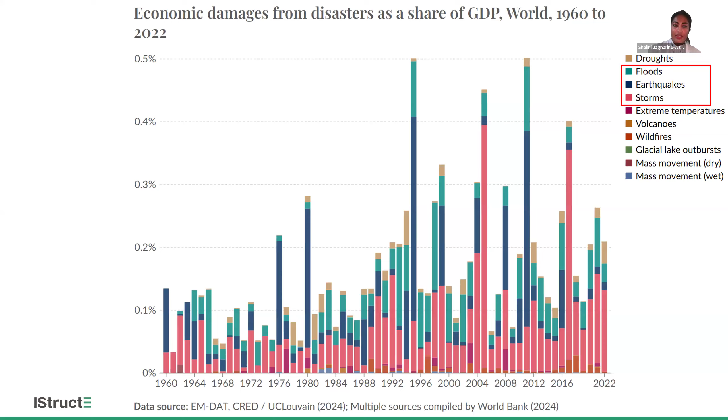Right. So looking at statistics globally, from data compiled by the World Bank, the vast majority of economic damages from natural hazards are a result of floods, earthquakes, and storms, as you can tell by the chart. For South Africa, it remains about the same. So the vast majority, I would say, would be because of storms, followed by earthquakes and floods.

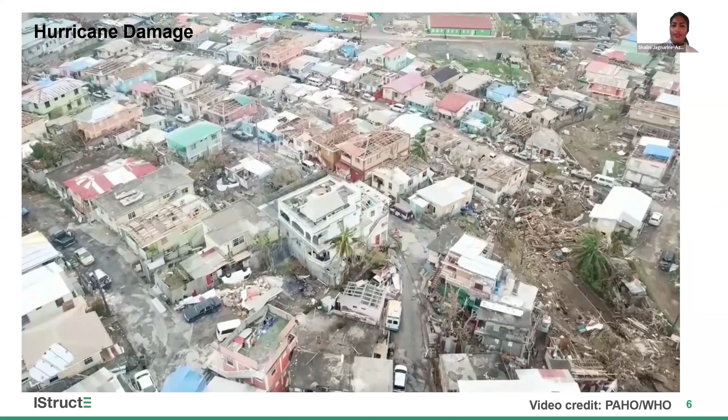Now, this is a short video. I'm only going to show you part of a clip. And this is from Hurricane Maria in 2017 in an island called Dominica. It has a population of about 230,000 people, standalone island. And this is a typical example of what a country looks like after the impact of a major hurricane. You can see that there's widespread catastrophic damage. 98% of all buildings in this country sustained some level of roof damage or complete destruction. I won't show you the entire video, but it's just an example of what it looks like. Pay attention to this river because I'm going to ask about it in a short period.

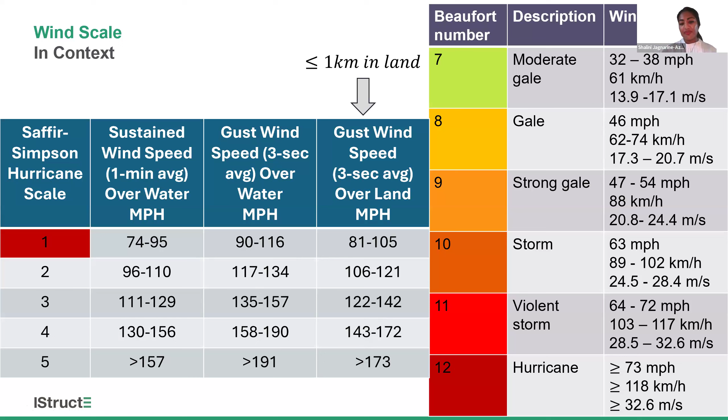Right. So just to set some context between what you use in South Africa, which is the Beaufort scale, for wind speeds versus what we categorize as hurricanes. So you run from scale 1 to 12, your maximum being a category 12, which has wind speeds of about 32 meters per second. That's equivalent to about 73 miles per hour. That is a category 1 hurricane. That's not what we call a major hurricane or a major typhoon or cyclone. That starts from category 3, looking at these wind scales. So the video that I just showed you for Dominica, that part of the country experienced category 4 wind speeds, which is about 65% higher than what your category 12 is in the Beaufort.

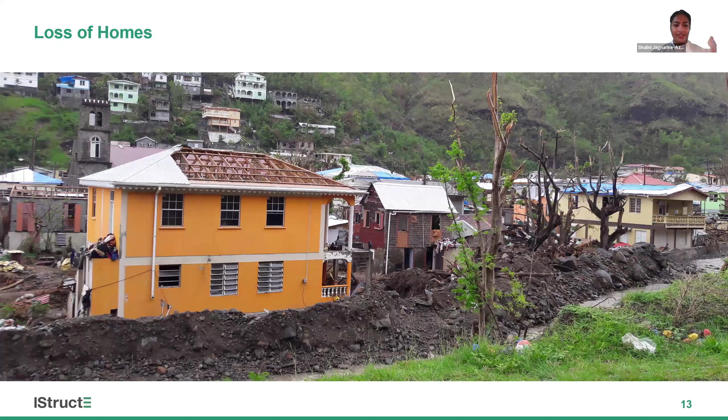You'd have loss of homes, and you could tell by the volume of river sediments that you have in these communities, and it's all because of wash down from the central mountain area that came down into communities. Some other photos that look just like that.

I would think impact would be no access, no services like electricity, water, stuff like that. We don't see this in South Africa, so I'm taking a huge guess now.

Yeah. Sorry. So actually what it is, you see the volume of debris and waste that's produced because of damaged structures and buildings and facilities. That all has to be collected and deposited in an area. Now, Dominica is only 750 square kilometers, or just under 290 square miles. It's a very small space.

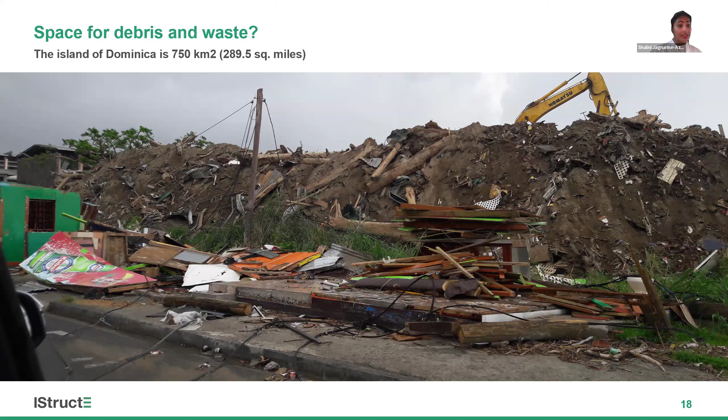What do you do with all of the plastic water bottles that have to be brought in by barge or by boats into these islands to give to the population? I mean, the hundreds of thousands, probably even millions of plastic bottles, that is just as a result of having to respond to the event after the impact of a major hurricane. So some other considerations that we don't just pay attention to as design structural engineers, for example.

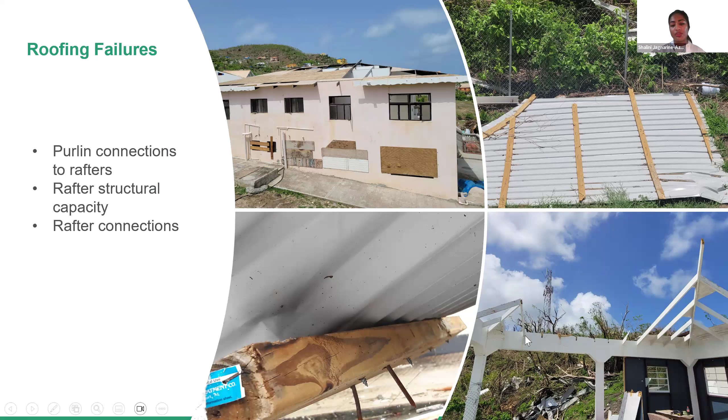Sometimes, and what you'd see a lot, especially in some of the older buildings and the traditional form of construction, is where they embed rafters into part of the ring beam. In some instances, they would run a rebar through part of the center of the ring beam. That already results in a point of weakness in the rafter, where you'd find splitting once the uplift pressures exceed the capacity of the member.

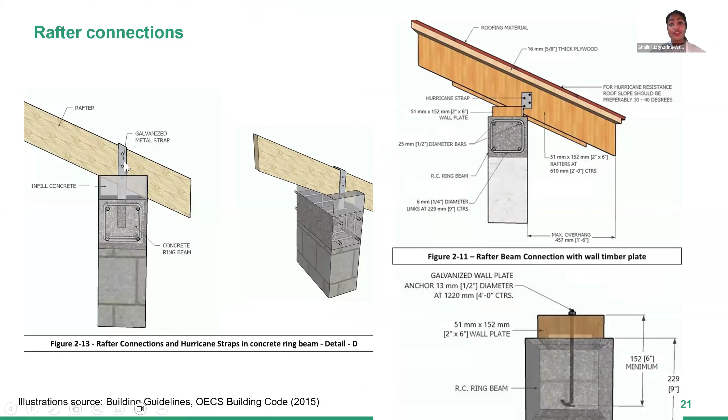Now, another thing, this is just a couple illustrations of how you should connect rafters onto the load-bearing structure below. Just two examples, but there are many different ways that you could do it. Just to note that you aren't damaging or reducing the cross-sectional area of your load-bearing rafters.

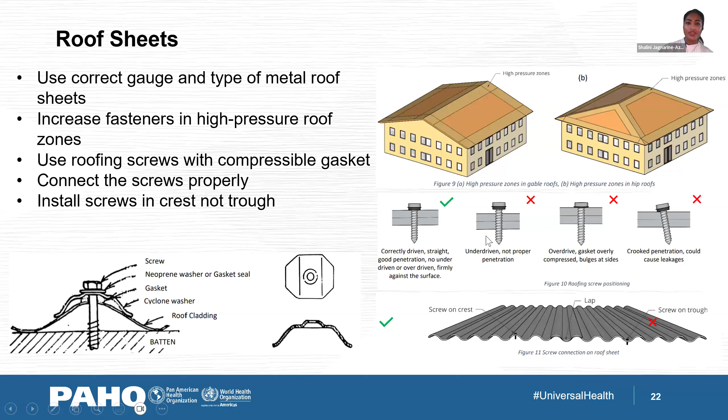But the type of roofing screws that you use, the spacing of your roofing screws, the thickness of your roof sheets, how the screws are connected, those are all very important to ensure that you can get adequate resilience.

Now, why are roof sheets such a nebulous sort of topic for so many people? It's because, and I don't know what they use in South Africa, you could probably tell me, but when you're saying that you're going to use a galvanized roof sheet over a building, what do you specify it as?

Do you mean how do we specify the thickness or the spacing? Yes, the thickness. So typically in South Africa, you would have roofing contractors that specialize in that type of design and details. So they would tell you where your rafters or your truss spacing would be. Sheet thickness really comes from the sheeting specialist suppliers again.

So it varies from thickness 0.5 to 0.8, and sometimes more. So it's all dependent on the type of sheeting that you want to put on. And then obviously there's a lot of things that go with the type of sheeting that you use. Okay, that's great. So you specify in terms of millimeter thickness, 0.5 to 0.8. Yes.

On this side of the world, and perhaps that comes from the United States, I'm not sure, but we specify as gauges. So when you go to purchase a roof sheet from a supplier, they would say, okay, we have 24 gauge roof sheets, or we have 22 gauge roof sheets. But gauges are not standardized in the industry. So for one supplier, a 22 gauge might be 0.5. For another supplier, it might be 0.65.

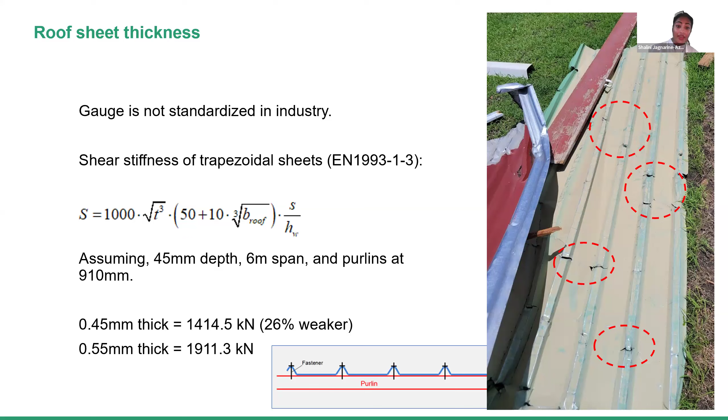That means that the likelihood of that being sheared off because of the wind pressures that you now have is higher than a 0.55, but you and your neighbor both went and purchased 22 gauge roofing sheets. And people don't understand why some are failing and some are not.

Some examples of roof sheets that actually stood up. This was from an island called Petit Martinique, which is off of Grenada. This experienced Category 4 Hurricane Beryl. This was the first time we ever had a Category 4 hurricane so early in the Atlantic hurricane period. It occurred between the 1st and 2nd of July 2024, with wind speeds of 150 miles per hour or 67 meters per second.

And this is a roof that's right on the waterfront, not this building actually. It's right on the waterfront, which stood up beautifully. You can tell that it wasn't a new building. Some of the roofing screws were partially corroded. I hope you can see the spacing of the roofing screws, but it just goes to show that if it's done well, it could stand up.

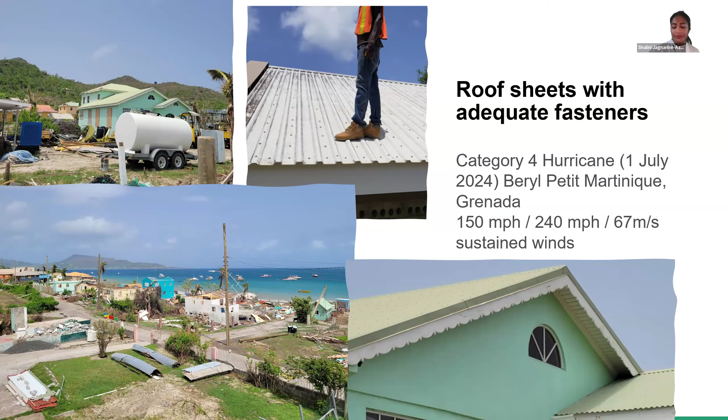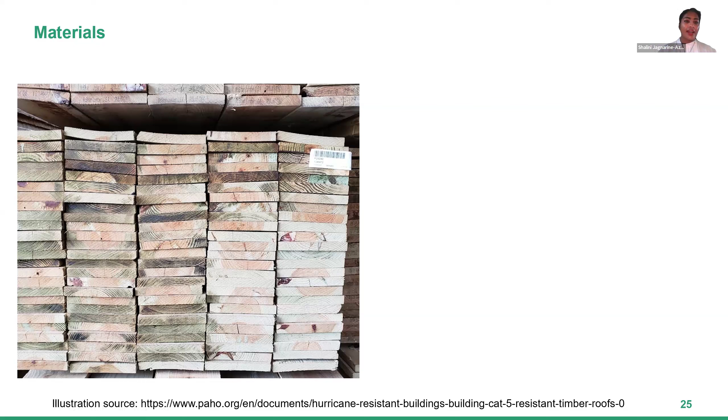So there's a document that we did as part of the Pan American Health Organization, PAHO WHO, on hurricane-resistant buildings. And some of the checks would be to ensure that you are using suitable materials. So with these types of materials, you could probably only use about 40% of the lumber that you see here, and some were not usable or should not have been used.

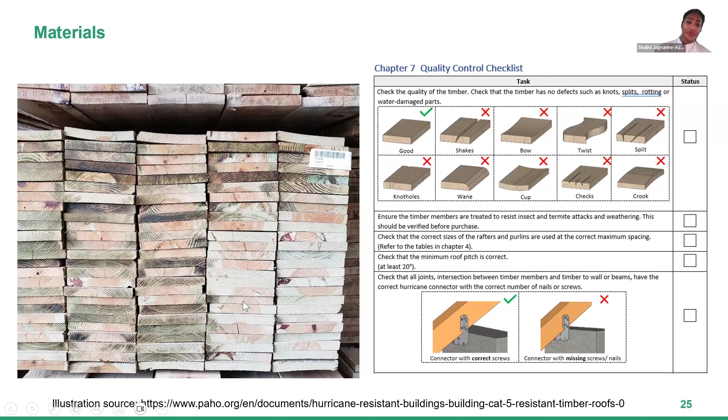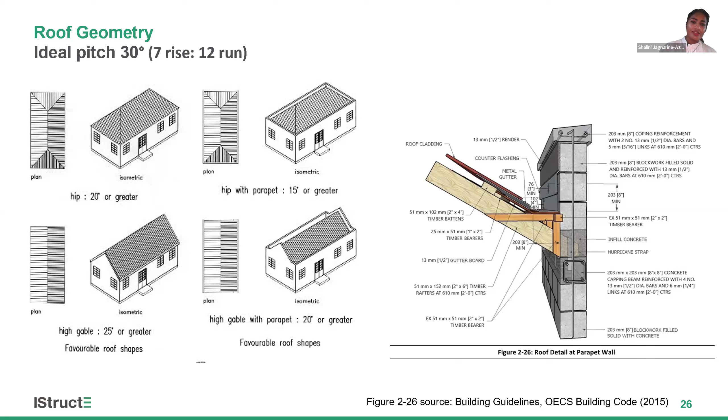Because the other thing that comes with storms and hurricanes and different events would be sometimes not high winds, but a lot of rain. And so all of these things, it's a multi-hazard event, and our countries are multi-hazard zones. So we'll speak a bit more about earthquakes later on, but there are so many factors that need to be considered when we are doing designs as engineers in this region.

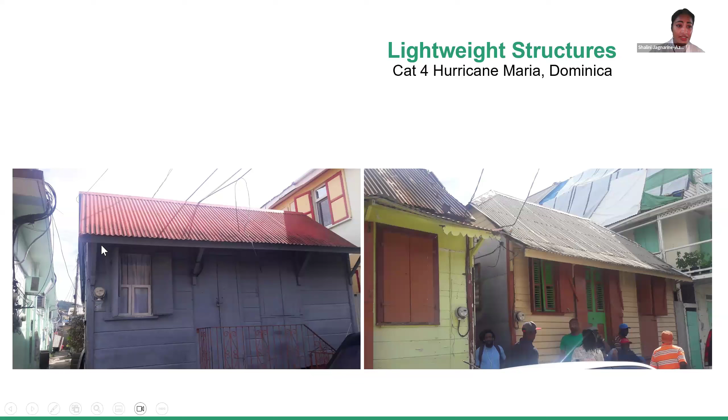Some examples of buildings with ideal geometries that stood up. These are, we call them chattel houses in Barbados, but these were in Dominica. Again, category 4 hurricanes. You can tell from the damage of neighboring buildings, but these stood up beautifully, no damage whatsoever, completely functional after the event, not even the loss of roof sheets, even though they've been there for a while.

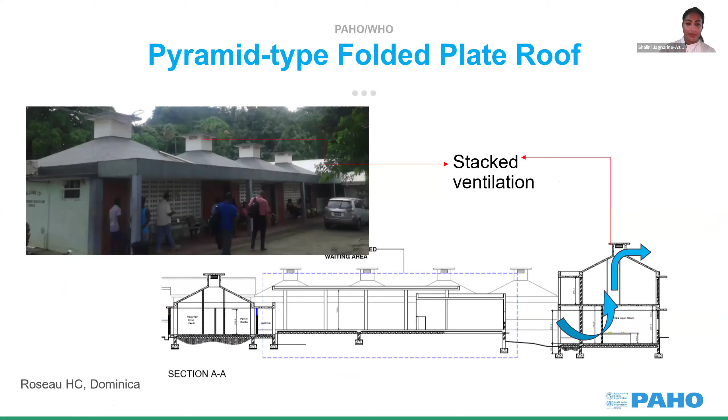Other types of roofs that perform remarkably well in these events, in both hurricanes and earthquakes, would be folded plates or shell roofs. So this is a pyramid type folded plate with stack ventilation, which is great for the increase in temperatures that we're experiencing as well because of climate change. Some other examples of folded plates would be these two.

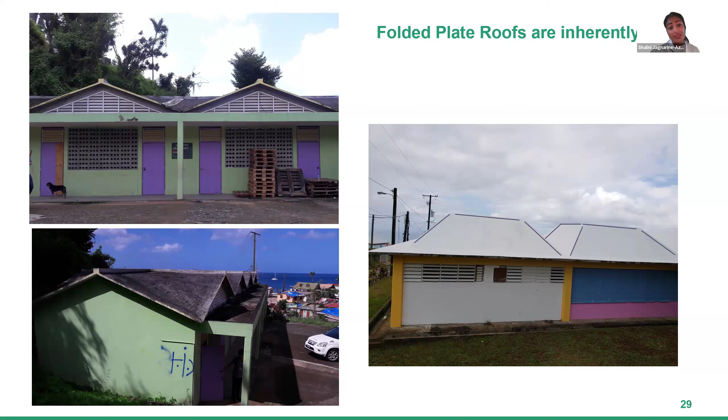These were from schools. Now, the waterproofing, especially on the facility on the left, probably had never been reapplied since the building was first constructed about 30 years ago. It still doesn't leak. The reinforced concrete section of the roof is actually only about 2 to 3 inches, so 50 to 75 millimeters thick, with a thin layer of mesh reinforcement for anti-crack. And fantastic structures. The lightweight also attracts lower seismic loads, which makes it ideal for that type of multi-hazard region.

Another type, this is just a simple cylindrical shell roof as well. This was done over the central medical stores at the hospital, where we lost all of the medical supplies to the country after the event, because this roof sheet was put on temporarily right after the hurricane so that they could find a space to put back in materials, but we eventually demolished that and built this instead.

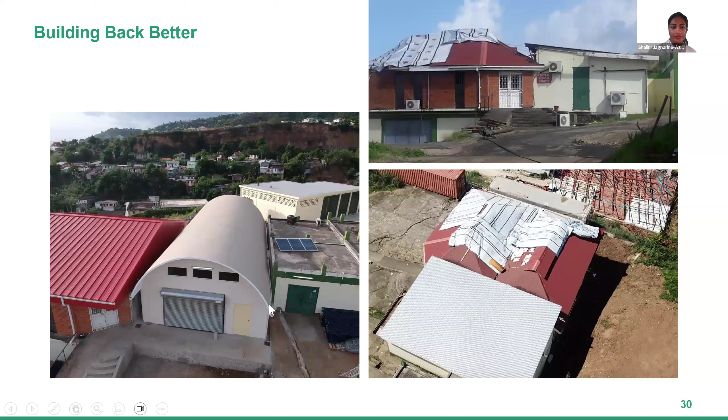Now, the next weakest link after your roof. So you could tell from this photo that the roof structure is completely gone. In this case, there obviously wasn't adequate connection between the actual lightweight timber roof onto the supporting walls below. But let's say the roof stayed on. What would be the next weakest point in the structure? Can anyone tell me from the photos that they're seeing?

Yeah, those lintels or beams across the veranda opening are not deep enough. It would have bent that upwards. It would have pulled that apart at the edges. That is a possibility. The other possibility is you could have the failure of the parapet walls first.

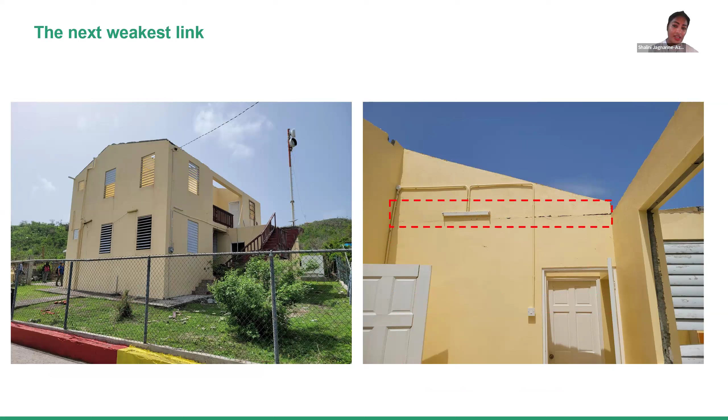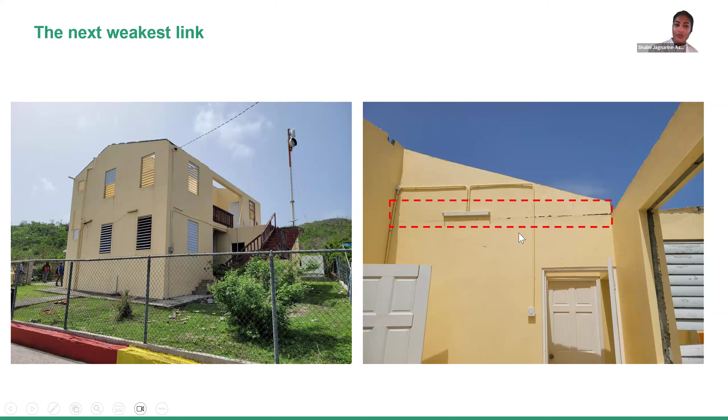So when I visited these facilities, what I noticed, and what's not so visible on the exterior of this photo, is this continuous crack that went along between the top of the lintels and the parapet walls. So it's likely, now I didn't do invasive investigations because that wasn't my requirement in this case, but it's likely that the parapet walls are not adequately or securely connected to the ring beams. And in that case, you can have these things happening, when you don't have sufficient reinforcement.

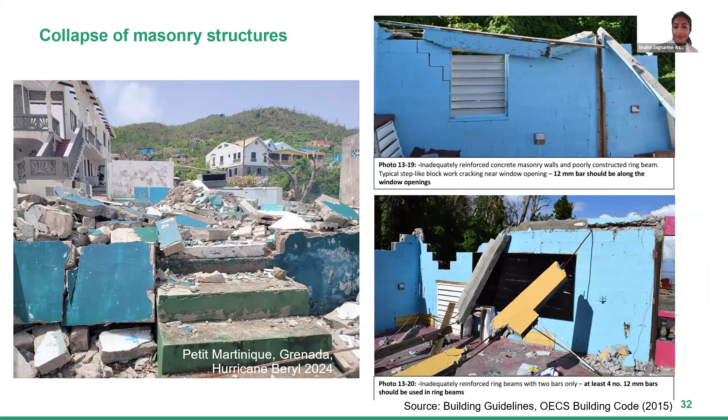Both of these structures were destroyed because of hurricane winds, where you have unreinforced masonry or poorly reinforced masonry structures. Some examples of how it should be done. This doesn't show the horizontal reinforcements, but really you should have, what's the term I'm looking for, where you confine the masonry on the inside of the parapet wall. So you're effectively creating beams around the entire perimeter of the element, and then you reinforce that. And of course, you have vertical reinforcement that ties back into your load-bearing walls below.

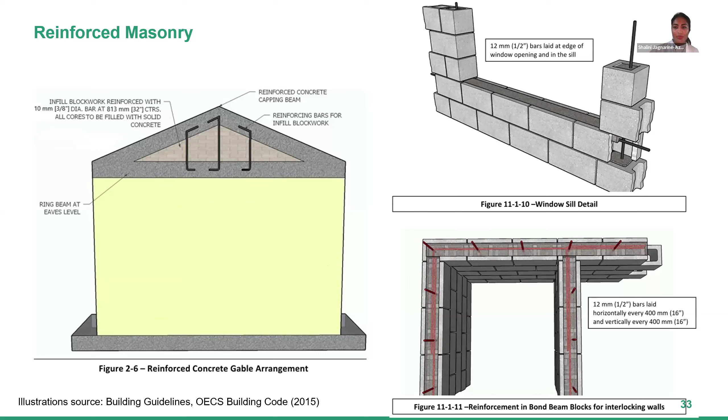These are just some other examples. I'm sure you all know how to do reinforcement for block masonry, if block masonry is used commonly in South Africa or not. This here is to show about windows, and we'll speak a bit more about windows shortly. But the gentleman who just spoke to me was speaking about lintel beams.

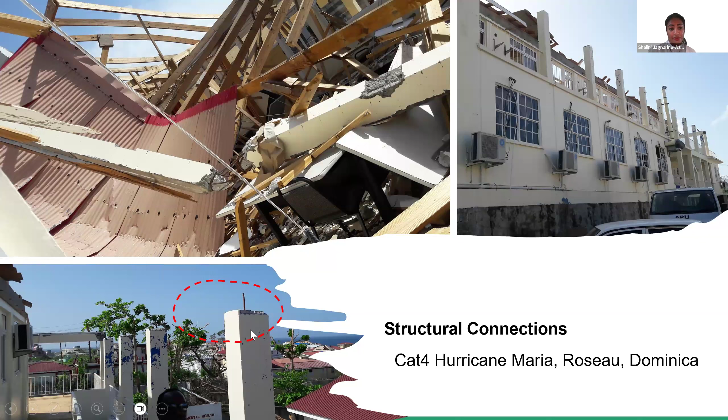And this was from another facility at the hospital, a psychiatric building actually, at the hospital in Dominica, where this would have been, and sorry for speaking in feet and not meters, about 60 feet or so, probably 80. And the entire lintel beam off the eave of the roof was ripped off and slammed onto the lightweight timber roof on the interior space of this building. There were patients in the facility when this occurred. And that happened because of the inappropriate connection between the reinforced concrete column and the lintel beams.

Any questions on anything that we've seen so far? Okay, not yet. All right, so we'll move on to other aspects of the building envelope, which are also very weak elements of buildings. So even if your roof stays on, once there's penetration through any part of the envelope of the building, because of the very high pressures of winds, the rains that move almost horizontally, the damage and destruction that you get on the inside and the loss of your furniture, your equipment, your stocks and supplies, it's catastrophic. So windows are the next aspect that we'll speak of.

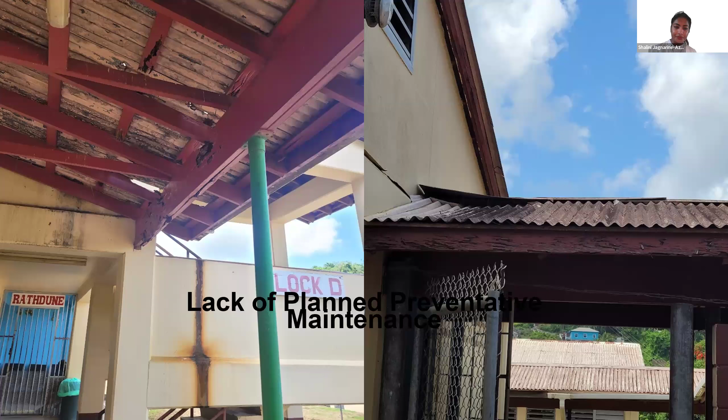There's also lack of planned preventative maintenance. So oftentimes when structures start looking like this because of lack of termite treatment or regular treatment and water damage over time, it's easy to lose structures.

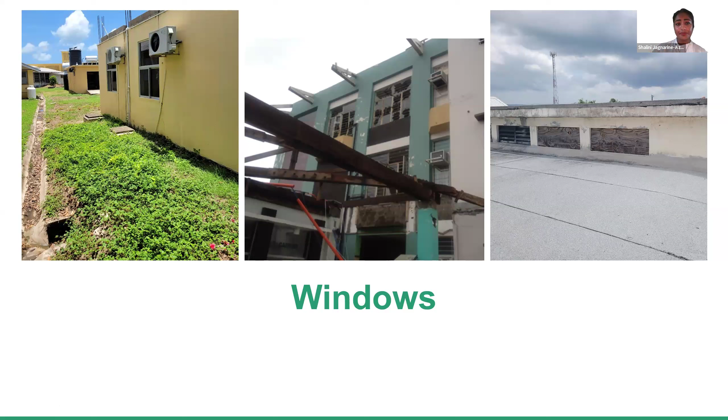What we do advocate for is NOA, Notice of Acceptance, from Miami-Dade County. So they do shutters, exterior doors, and windows, and they're tested to meet the specifications that we get here in the Caribbean, because Miami, Florida is less than an hour flight away from where I am in Jamaica, and they also get hurricanes. You would have seen Hurricane Helene that impacted the western side of Florida, as well as other states in the US.

What they do is you test for high winds, you test for small missiles, which are small debris that comes in hurricanes, large missiles, and you test for driving rain.

Once it's tested in the lab and that batch is approved, you install it in accordance with specifications and you can get the resistance. Usually though, and this is where one of the problems starts, a lot of them are only tested and rated for category 3 hurricanes. Now, category 3 was fine probably 10 years ago, where you'd only get maybe one major hurricane beyond that, a Cat 4 or Cat 5. Now, because of climate change, we're going to start having more category 4s and 5s because for this season, we've already had 2 category 4 hurricanes that devastated the countries and areas that they impacted.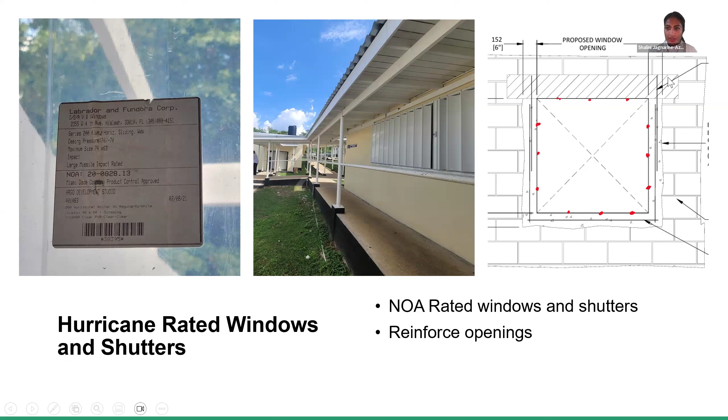My little dots here would show samples of how screws should be connected into the actual structure. What you'd find sometimes is people put lintel beams over windows, but around the sides, especially if it's block masonry, it's not reinforced. If you are using NOA rated, it depends on the type of element. So accordion shutters like these would be anchored top and bottom only, but windows, for instance, have to be anchored around all sides. You can't just anchor it into a hollow concrete block because then the next point of failure would be that connection between the block and the window. There's nothing holding it, so that would fail, and then eventually the window would probably get blown out. So that's why the 3D image that I showed a while back indicated reinforcement around windows and doors.

Now, storm surge is a major event. These photos were from the Philippines again in Tacloban following Typhoon Haiyan. That was very devastating because of the magnitude of the storm surge that came with it. In some areas, like in this area where this wall was taken, the storm surge level was about 13 feet high. So that's about 4 meters. Approximately 6,000 people died. Now, usually in a hurricane where you just have high winds and not a massive storm surge, you could have dozens of people going missing or fatalities after the event. Once you bring water into that equation, your fatalities increase exponentially. So here, between 6,000 and 10,000 people died.

These photos were taken around hospitals. This was a village on the coastal community where ships came in and just washed and destroyed people's homes, and they had nowhere else to go. So it's massive. And bearing in mind that this is well inland, let's say. This is not right on the coast, but that's a type of damage that you can get from walls that would be normally safe and suitable had it not been for the storm surge.

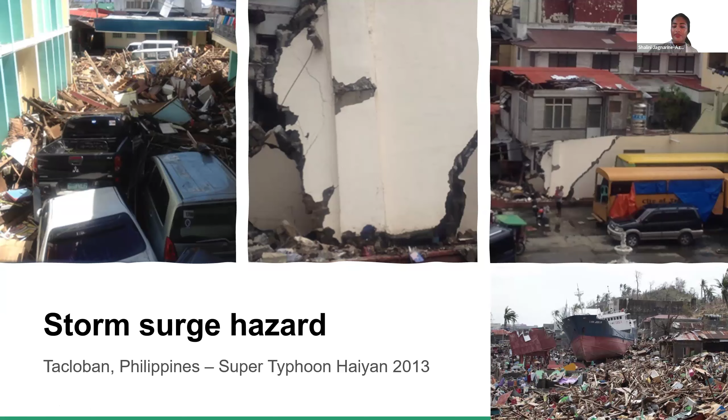Now, earthquakes. So moving on very quickly. This is a photo of a hospital, Hospital L'Aisle, which was closest to the epicenter of the 2021 earthquake in Haiti. So not the 2010 one. I did not go to that one. I was too young. But 3,000 people died in this earthquake. It was a 7.0 magnitude. It occurred in the south of the country, where it's not as populated. The 2010 earthquake occurred in the capital. Hence, hundreds of thousands of people died. In this case, thankfully, it was not as populated, but you do have this type of damage that occurs.

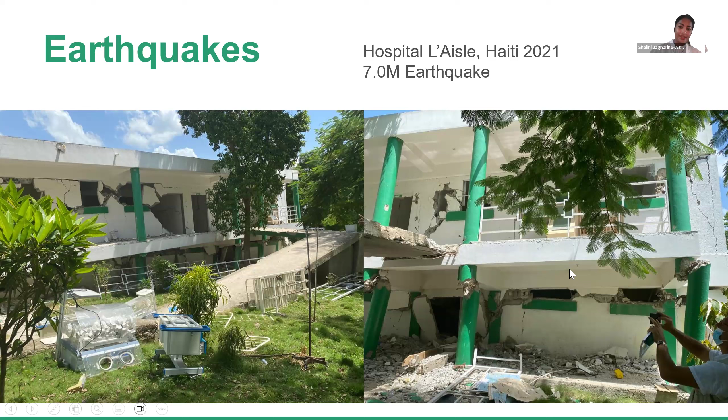So why does this happen? Well, other types of damage that are quite common would be shear cracks in walls because of lack of reinforcement or because of ad hoc additions. What you'd find happening here a lot is you would get an architectural design, a layout, and then you would do a structural design based on that.

And the structural design may just be the beams and columns and the structural frame itself without any consideration to the infill masonry walls or the partitions or whatever goes into that space. And once you put stiff elements into a building, it will attract load. So if these weren't designed as shear walls, then they will shear because lateral loads will get transferred to them because of their stiffness. So how can we treat these elements?

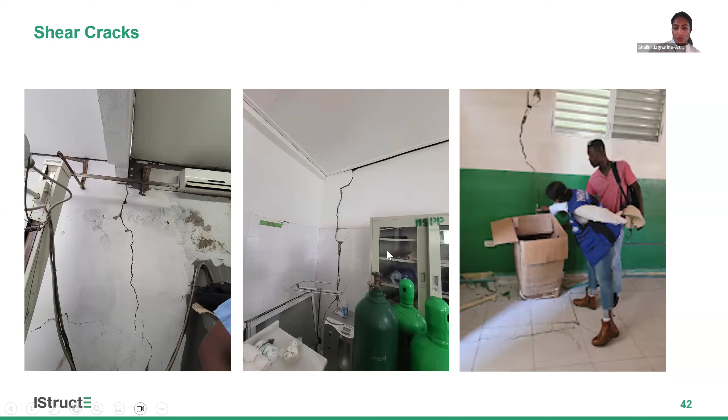So a lot of these were refurbishments that we had to do. Out of these two photos, I have photo A and photo B with illustrations. What would you say would be the better solution for that type of shear crack that I just showed? Reinforcing in the joints.

Yeah. So this solution on the left-hand side would have been for cracks that are not as critical. And what they recommended here, actually, they did put rebar on both sides as well. So what they did here was they took away some of the mortar. They put expanded mesh on both sides. So then you can prevent the transfer of that crack. You can add back a bit of tensile strength to the wall in that area.

In a lot of instances, in order to tie the segments together and ensure that you get the transfer of that shear, you would have to cut recesses into the wall and put your horizontal bars back in addition to the anti-crack mesh that goes on both sides of the walls before you can tie them back in. And these should be tied on, hopefully, to horizontal bars that exist within the wall. If there are no horizontal bars, then of course we have bigger problems.

There's another solution where I've seen some people actually build out a frame. So they actually build out a cage, a steel cage, horizontal and vertical bars, and they build the wall out. If that is an option, that could also be done. It's expensive. Sometimes you may have to just demolish that section of the wall and then rebuild it suitably.

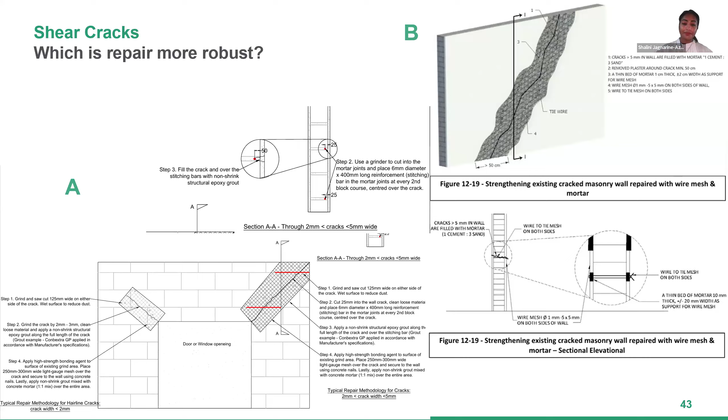Now, do people have a good understanding of piers and spandrels in masonry walls? Are masonry walls common in South Africa? Yes, they are. Very common. Right.

So then you should have a pretty good understanding of piers and spandrels, where spandrels are the ones that span over openings like doors and windows especially, and it effectively acts like a beam to transfer load between the piers, which carry our gravity load down to foundation or down to lower load-bearing structures. They're effectively slender beams and columns, so that's how it's framed up. Based on your knowledge of that, what would you say would be the cause of failure of this hospital L'Aisle in Haiti? Short column. The shear failure and short column failure.

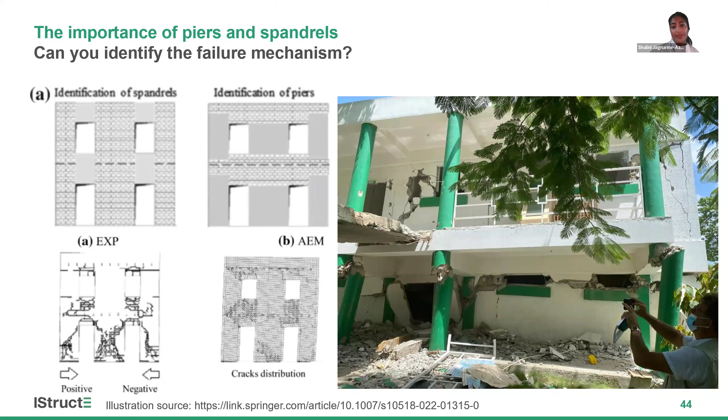Yeah. So absolutely. The wall. So it's likely that it failed first because maybe it was an ad hoc piece of work, or maybe it was part of the architectural design. But these sections of the piers, because there is a beam here that stood up well, good resistance, no failure at that point, but it sheared at the next point. So yes, this effectively created short columns in our piers, and it sheared across those sections, and then that likely transferred over to these cylindrical columns that also sheared because they were just overloaded. And then pancaking of the building.

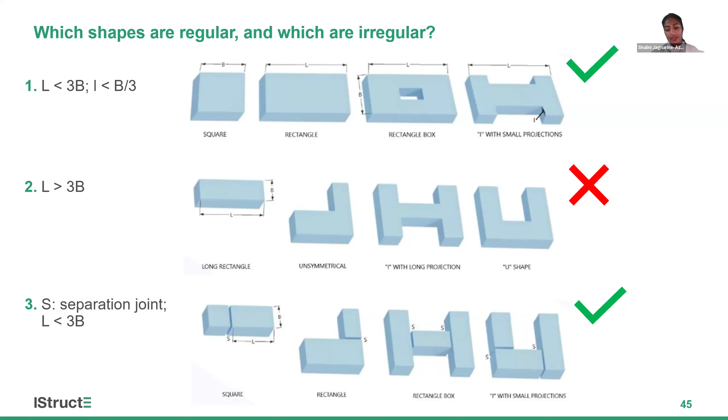What makes these buildings irregular? Because it's false regularity. You stand on the outside of the building, you look at it, it looks like a square or cube, and you're just like, yeah, that's great. That's a safe building. I would say it's all right. What about these buildings make them irregular? You got two stiff sides and two less stiff, more flexible sides.

Exactly. Yeah, you guys are great. Come work in the Caribbean.

So yes, this could often be a stairwell or lift shaft. If it's not designed, your center of rigidity is now going to be concentrated closer to your stiff elements, so it moves away from your center of gravity. Your center of gravity may be somewhere here. Your center of rigidity now may be somewhere here. And because of that, you're going to have torsion around that point.

Same thing happens with introducing block walls to some sides and then putting in a glass facade on the front. So work hand in hand with architects, ensuring that they understand these concepts and they work with you. So, to make this one more regular, what would you do? What would be your suggestion? You could try and introduce panels on the corner. So stiffen up that corner. Yeah, we could do that.

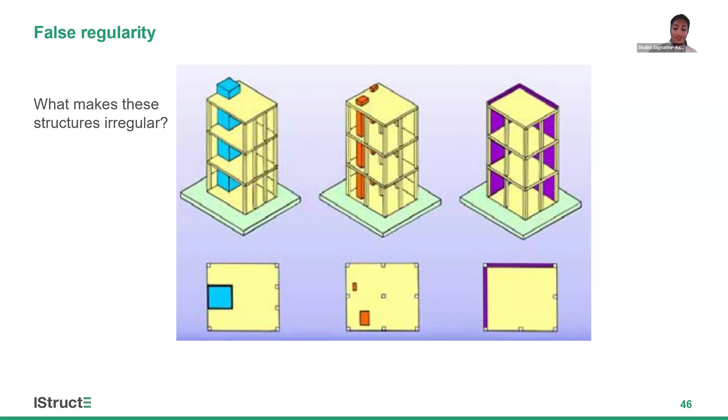Okay, now on to elevation irregularities. I think this is pretty simple for you guys. You'd probably see a lot of commercial buildings that look like these, where they try to create this impressive opening and facade and entrance into the building, where you have much taller columns that go into a space. Because of that, they effectively behave like soft stories, because these would be a lot more ductile than the other columns that are broken up by the floor slabs, the diaphragms. So you can have failure across this line.

In this case, maybe they created a parking lot on the base. So because my rigid walls don't continue all the way to foundation, these now become soft story columns. In this case, you just have a change in elevation of one or two of the floors. Because it's a lot longer, these longer, taller, slender columns behave differently to these ones. So they have to be checked, and you have to ensure that it can carry the lateral load safely.

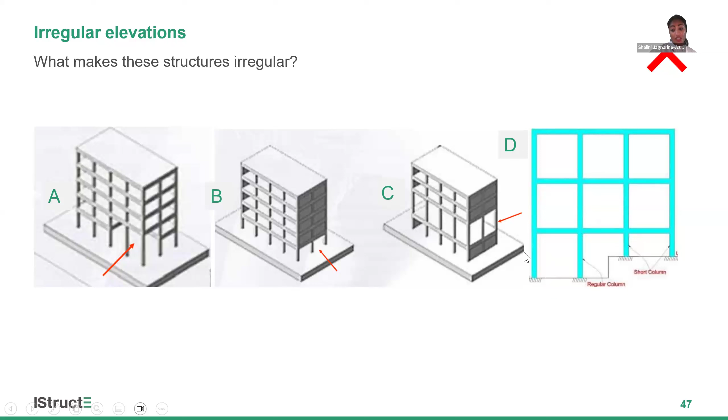A lot of times we would have this here as well, because of building on hillsides, where you have taller columns on the front or the back of the structure, and then short columns in some areas. Again, these columns would behave differently to these ones, and you could have these columns shearing across this point. So they need to be checked. So again, soft story failure.

This photo was taken after what I call a baby earthquake, because it was not a major earthquake, here in Kingston last year. Quite a shakeup. We had broken pipes and electricity went down for a while and tons of traffic because all the traffic lights went down. But this is just an apartment complex where they tend to do a lot of basement parking in the area.

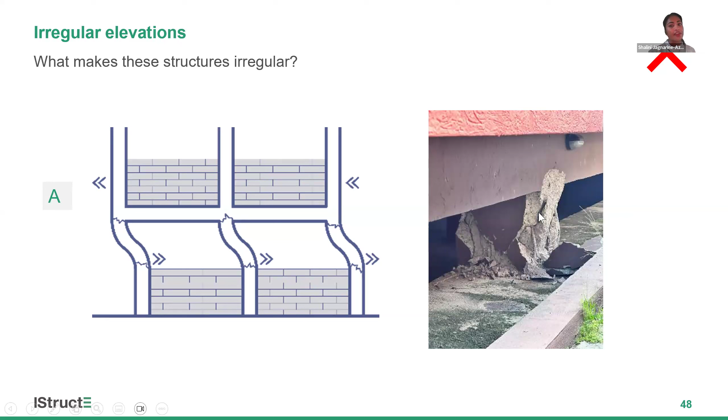And then they create this ventilation between the retaining wall on the side of the parking lot. So it's a cheap way, I mean, natural ventilation. And so because they've done that, they've created short columns into the space. Thankfully, again, it was not a major earthquake, so you didn't have catastrophic collapse, but that's what could happen because of this type of design. That's very common to see, especially here in Kingston, Jamaica, where I live.

What can we do? This was an elderly inpatient facility in St. Lucia where we were doing retrofits for resilience. So again, because of this natural slope of the land, they created a space for their laundry under the kitchen and the facilities at the back of the hospital. And it's vulnerable because you have a soft story area.

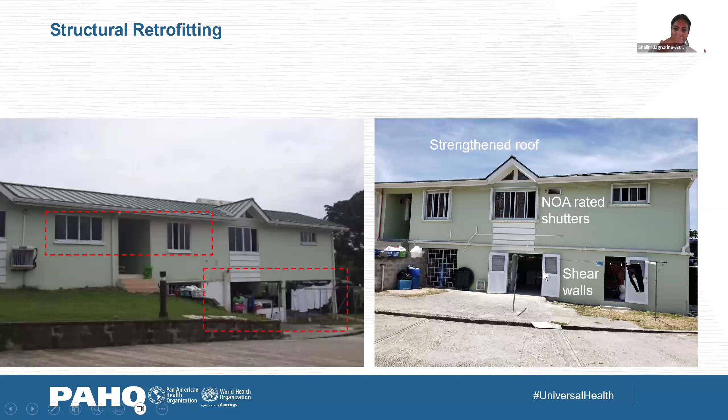So we just put in some shear walls, and we installed NOA rated shutters. All of these doors would be hurricane rated as well. Never mind you see louvers, but they're actually louvers on the fixed inside of a mesh section and glass, so the driven rain wouldn't be a problem. But these are some of the work that we have to do in some of the areas.

This was also in St. Lucia. Because we couldn't get things like that, and because of the use of the space, we had to introduce jacketing into the columns, introduce a lot of new columns along the length of the walls to ensure that we got suitable lateral resistance. In this case, we had to do some straps to the timber rafters in some areas to ensure we had adequate uplift resistance, and just general sort of upgrade to the age, the deterioration cracks to the building.

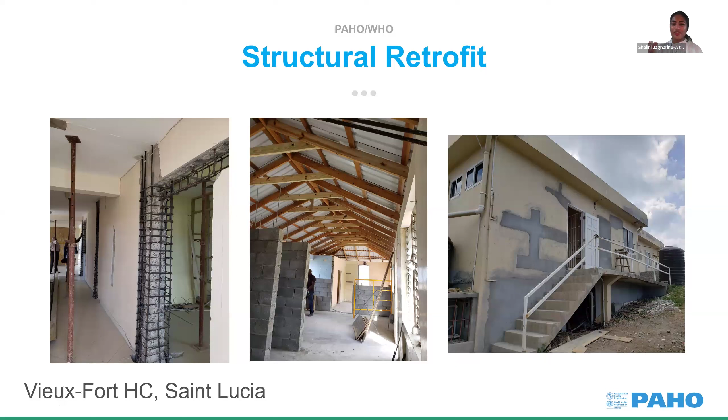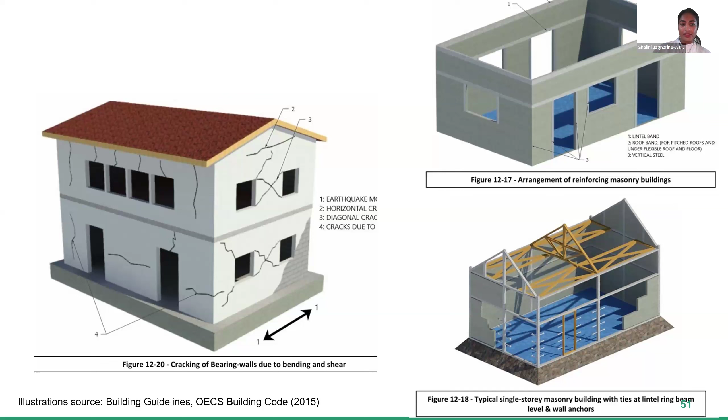This is from an illustrated guide for the OECS, the Organization of Eastern Caribbean States, where Dominica, St. Lucia, St. Vincent, all of those countries are part of it. And it's a great little document because now builders and laymen can look at it and say, this is what I need my building to look like. So it's quite well done.

Now, coming to the end, again, because of climate change. I saw that in South Africa, the highest wind speeds that you tend to experience is about 44 meters per second. That's about 98 miles per hour, somewhere thereabouts. Because of climate change, and you have a lot of towns along your coast, you will also experience increasing wind speeds and higher intensity storms. And then, of course, more erratic rainfall. Well, you also have floods, but I didn't touch on floods really in this presentation. But these are things that you need to be aware of and that you need to consider.

And perhaps, I don't know if there are checks and if they update their hazard maps regularly, because it's something that we're looking at doing now in the Caribbean again. The last time we updated it was in 2018. But it needs to be checked and updated regularly, because what you may find is that you now have higher wind speeds than you had 10 years ago.

In the Caribbean, we also include a climate change factor. So for category 2 buildings, we have a 15% increase in wind speeds because of climate change. And we have a 10% increase in wind speeds for categories 3 and 4, the importance categories of buildings. So that helps to not just use the wind speeds that you see in your codes, but to actually account for the changes that will come.

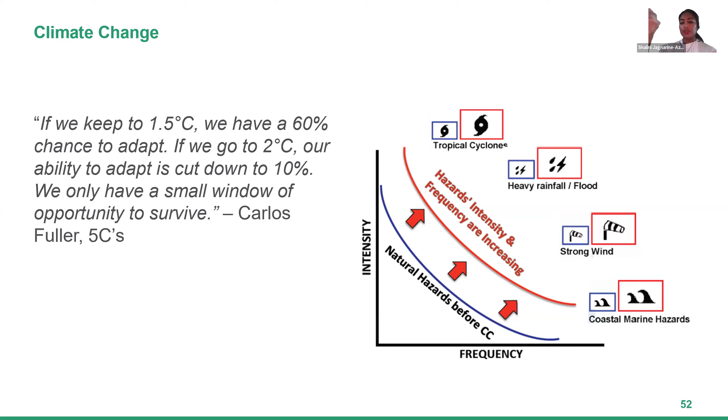Now, what are your takeaway points from this presentation? And this is where I open it up to the 41 people who are listening. I want to hear from all of you, please.

See, we have a lot of people offering. Lesson learned, I think, from our group is that the devil is in the detail. It's very important to get your details correct, and do it right the first time. The first time, yes.

Is that Ron I hear? Yes, Ron. Oh, Ron, nice to hear you. I hope to see you soon. Well, lovely to hear.

Absolutely. Get the details right. What else? Did anybody else take away anything else from the presentation? To the extent, get the concept right. Yeah, absolutely. That's where I usually start. You get your structural, conceptual design done correctly, to withstand all of the hazards that you have based on your site location, and you're 85% of the way there.

Anything else? I think for me, what strikes me is the fact that people don't understand what structural engineers do, and people just do things without taking into consideration what we do, and that's a big issue in developing countries or in very poor countries where people just do things and the authorities don't clamp down on these things. So that's my take on this, because the same problem I'm seeing there I also have in my country as well. I agree. Yeah, that's a big point.